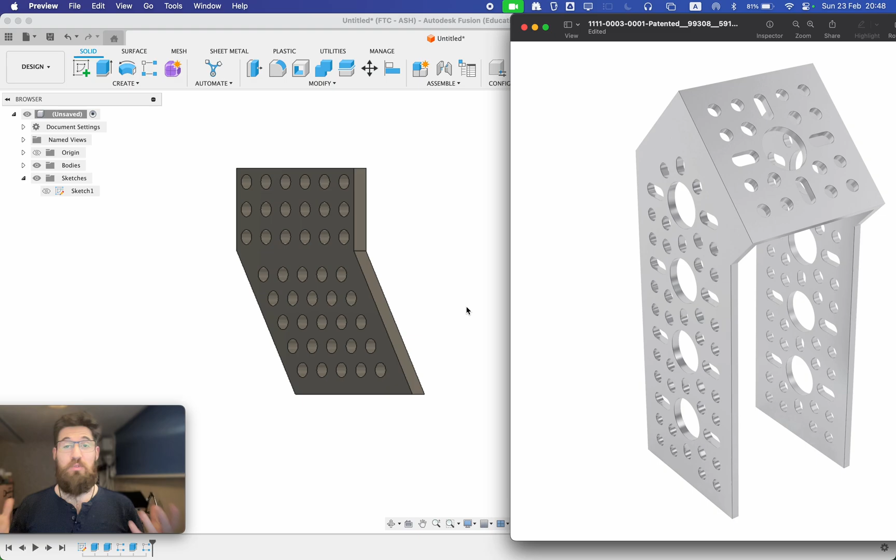On Fusion, everything starts, and the basic workflow is effectively taking a two-dimensional sketch and pulling it out into three-dimensional space. So for a quick example, let's just try something like that.

Up in the top in our toolbar, in the solid workspace, we're going to go ahead and click Create Sketch. And once you select Create Sketch, it's going to ask you to select a different plane.

If we look at our view cube here, we can see our top, our front, and our right. And we can select different planes that would be, say, the top of our cube, the front of our cube, or the right of our cube.

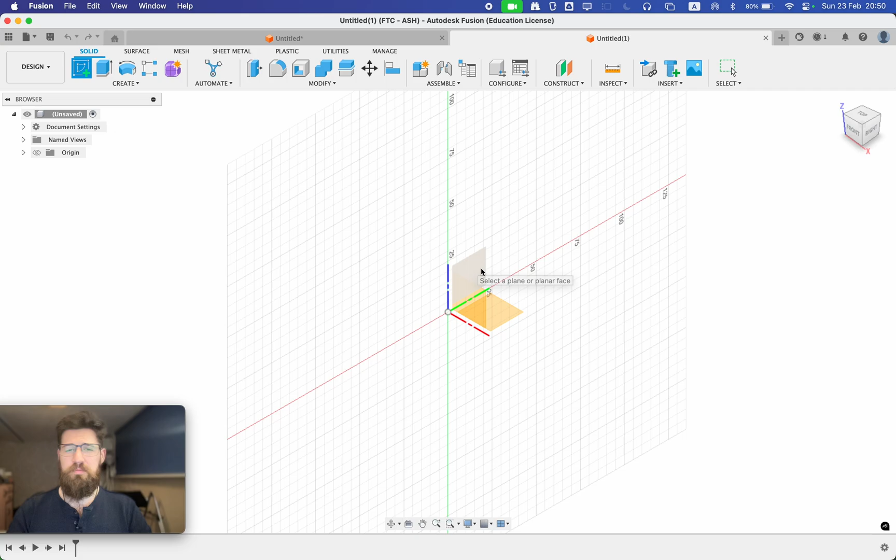For me, I'm going to choose the top of the cube, which is going to be on the XY plane - this red X, and then this green Y plane. So I'll go ahead and select that. You notice that it automatically tilts my screen to be able to see directly on top of the XY plane.

You'll also notice that my tools panel has changed. Instead of using the solid tools, we're now looking at the sketch tools. For the sketch tools, it's exactly the same as you would use in a lot of drawing programs, to be honest. It kind of feels a bit like Microsoft Paint.

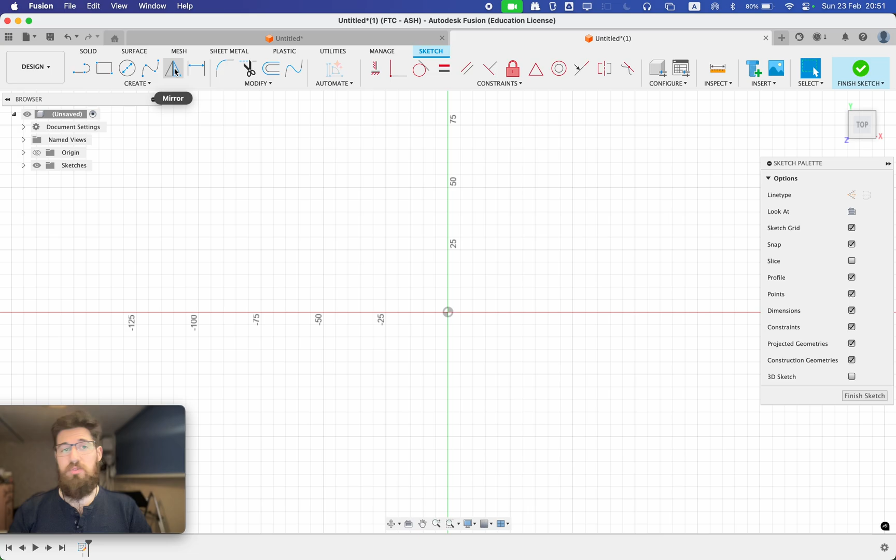So you can grab lines, two-point rectangles, circles, splines, mirrors. You can make ellipses, polygons. There's a lot of different things you can make.

So for example, let's just take a two-point rectangle. I'll click on this. And you always want to start your sketches from the origin point. This is this little circle with these dashed lines. This basically keeps your designs centered in place.

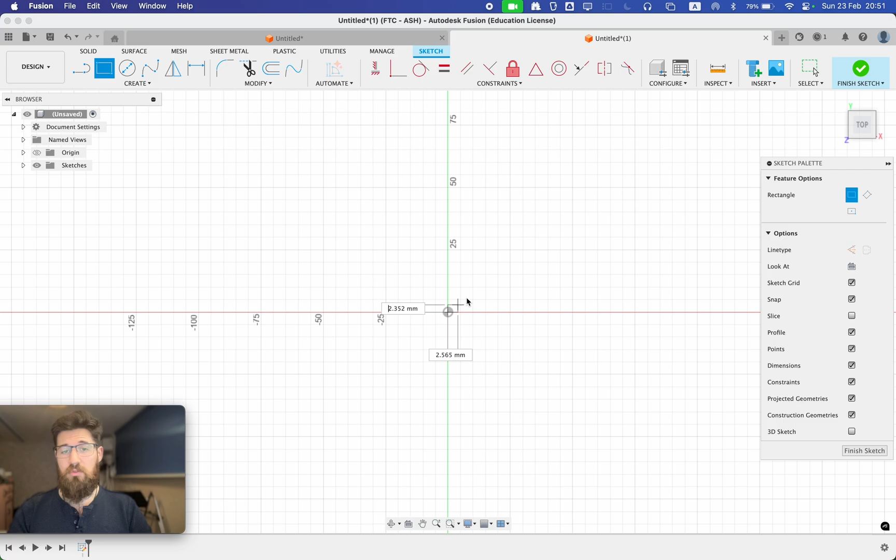So I'm going to go ahead and click to place my first corner. I can drag up, and it doesn't matter what dimensions you choose. I'll just click to finish off this.

Now in order to bring my square into 3D space, I'm going to go ahead and click on the solid workspace or the solid work toolbox, and then go ahead and select Extrude. It'll automatically select the face that we just drew, and now if I were to click and drag, you can see we're actually starting to drag this into 3D space.

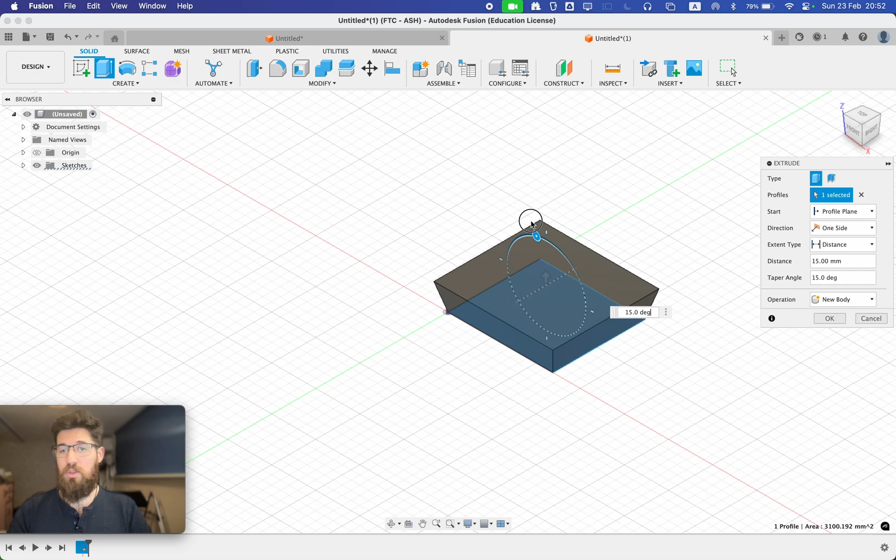You can also type in exact measurements if you want, or you can click and drag. You can even change the taper at which you are dragging things out. I'm going to choose 0 degrees for now because we're going to be making this as a 3D bracket.

So I'll choose OK. You'll notice that we now have two features down on the bottom of our parametric timeline. We have our sketch and we have our extrude.

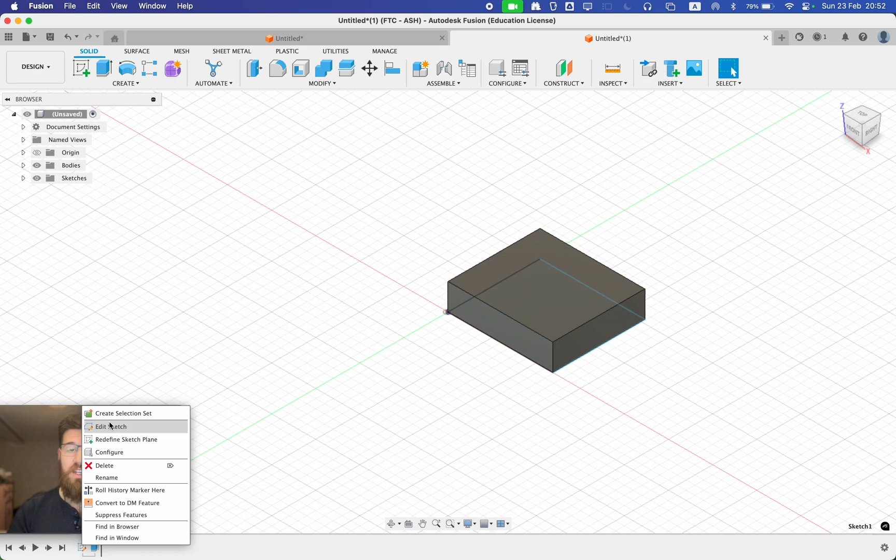Now this is the real magic of using Fusion as a CAD software. If I go ahead and right click, edit the sketch, or I double click on it, I can actually edit this sketch. Now on a sketch, anything that is black, you really can't change. It's a constrained or fully constrained section of that sketch. We'll talk more about that in the future, but effectively, you can't click and drag on black sections.

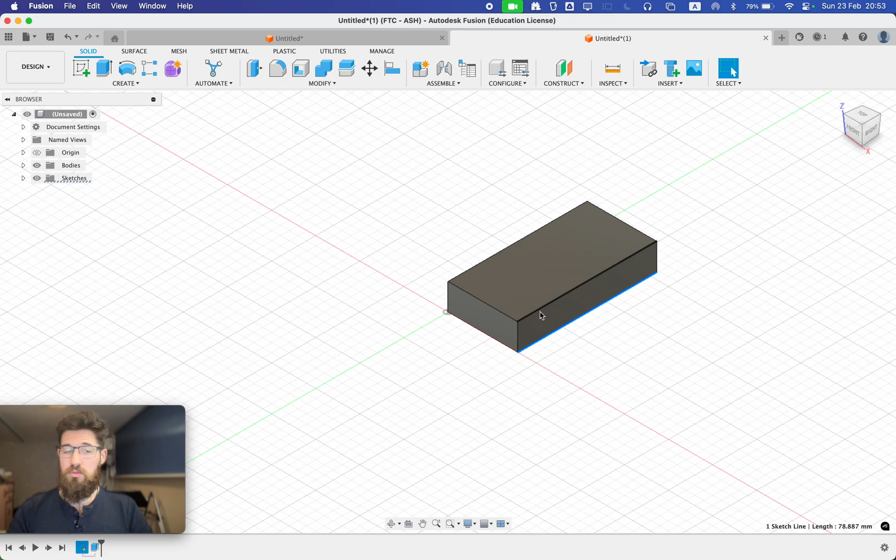Blue tools, you can. So if I click and drag on these blue sections, you'll notice that I can actually grab and move these to any size I want. So where we had a square before, let's try to make a rectangle. And if I click Finish Sketch, you'll notice that my extrude automatically adapted to the sketch.

And that's what a parametric modeling is all about. You can go back, make changes, and those changes will propagate across the rest of your sketch. Super, super handy. So let's get started actually drawing our component here.

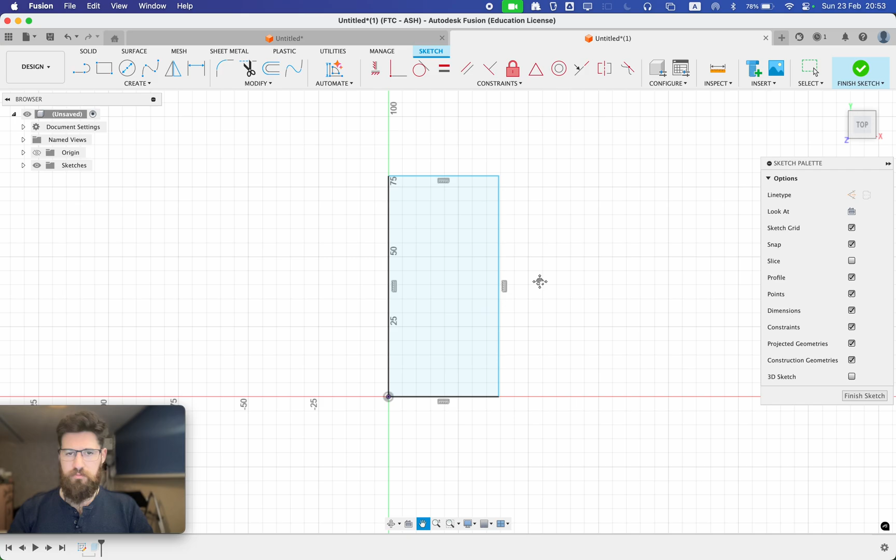So let's go back and we're going to edit our sketch. And we're going to add a few more constraints here. Instead of just randomly choosing a size, we're actually going to go ahead and put in some dimensions.

So up on the sketch tool here, I can go ahead and click on the sketch dimensions. I can select, oh, sorry, I already had the line selected. I'm going to press escape to deselect a line. Now I'll select the sketch dimensions again.

I'll select this far left-hand line and drag out. It doesn't matter how far out I drag here. This is effectively just going to show me the dimension of this blue line here. So if I click, it's going to show that dimension. It's going to give me some time to type it in. So for me, I'm going to select 24 millimeters as my initial height.

You'll now notice that I can no longer drag this top blue bar. It's now being black because it's being constrained since there's a dimension applied to it. I wouldn't be able to drag this, but I can still drag this side because I haven't defined the distance here.

Let's go ahead and grab one more sketch. I'll press escape, select this top line, grab my sketch dimension, and drag out. It doesn't matter where I put this, it's just whatever is easiest visually to see. I'm going to select 48 millimeters because I'm trying to create a part that fits well with a goBILDA piece, 24 by 48. The width of those structural bars are 48 mil, and that's going to make life really easy.

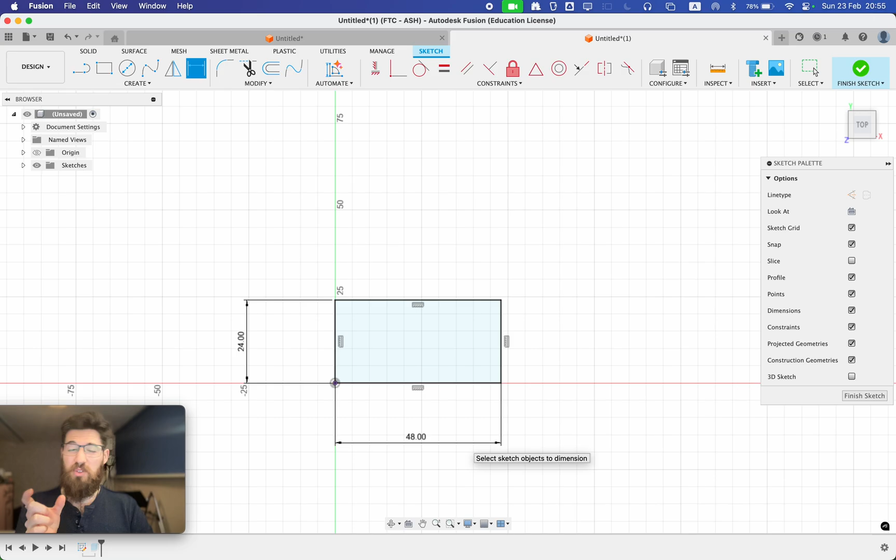If I press escape to get off my tool, you'll notice I can no longer click and drag any of these sections. If I go to the browser panel, you'll notice sketch one has this little lock icon on it. That means all the pieces inside the sketch are currently constrained, and that is good. We want fully constrained sketches because that allows our parametric models to adapt easier over time.

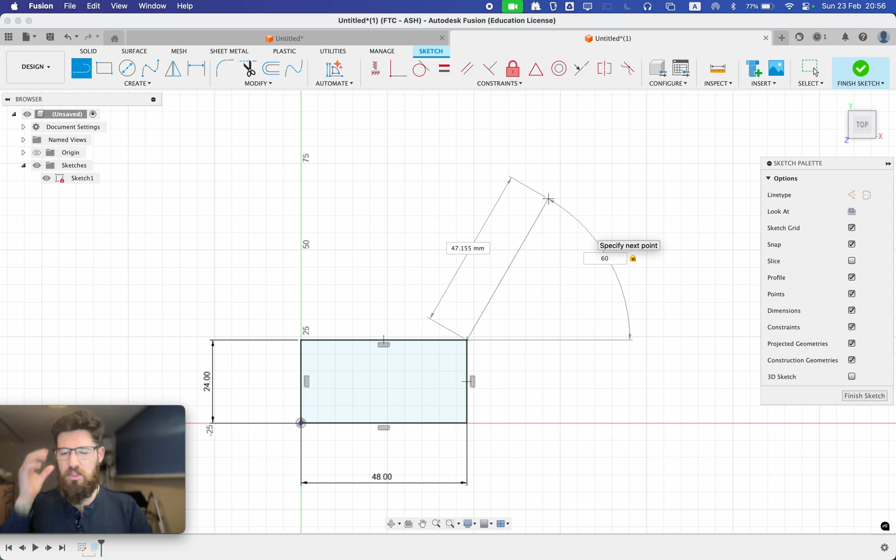Let's go ahead and add in this 30-degree angle bracket. I'm going to put in a line, grab from the corner here, and you can choose wherever you want. You could choose a specific length right now if you want, or press Tab to select the degrees at this point. Here you could select, say, 120, or select 30 degrees, or select a 90-degree angle or a 60-degree angle, which is going to give us that 30 we want. You notice that the line gets constrained.

It also draws out this imaginary line here, called the construction line. It's not a real piece of geometry, and we can't actually edit with it. We'll delete that line, and we'll delete this one as well. I can just drag a line out, put it wherever I want, and press this little checkbox to finish off my line.

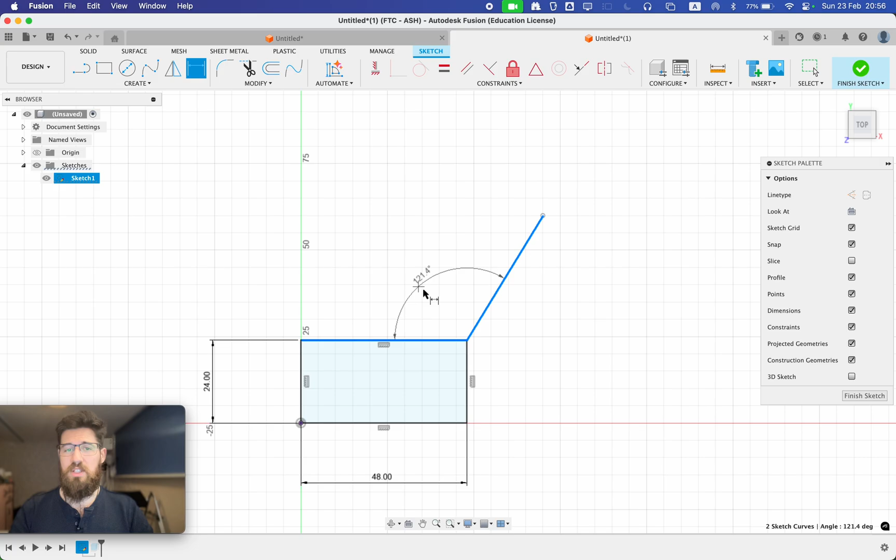Then I can grab this sketch dimension, click on my object, click on the second one, and you notice that an angle automatically comes up. Ooh, that was pretty good, I almost hit 120 right away, and we're going to put in 120 degrees. So when I select that, my line is automatically constrained at 120. You'll notice I can grab this blue dot at the end and select the length I want, because we haven't put a length on this yet.

So let's go ahead and do that now. We'll put in sketch dimension, and we'll call this one 48 millimeters. You could make this longer if you wanted to, but for now I'm just going to select 48. And I'm going to grab another line, we'll go ahead and just drag this out. You can put this wherever you want, I'm just going to put it over here for example.

Now we would want this obviously to be parallel with this other piece. If I were to hover up over here, you can drag off, and you'll notice Fusion's going to try to create some lines for me to keep that symmetry. But just to show you an example, I'm going to go ahead and click over here and finish off that.

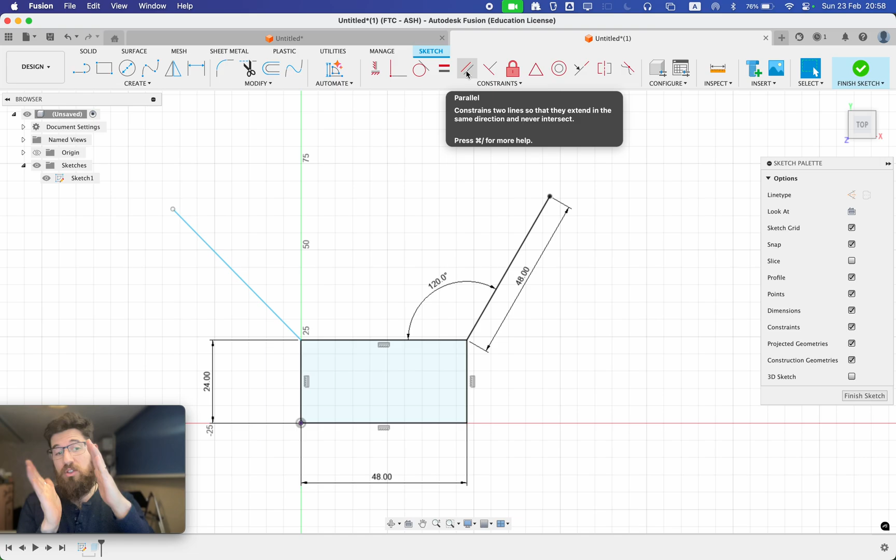Now let's make this line up with this part here. Up at the top here are these things called constraints, which we've been talking about a little bit. What I can do is grab this parallel constraint, and it's going to constrain two lines so they always stay parallel to one another. If I click on this, I can grab my first line, grab my second line, and you notice that it automatically snaps them to be parallel. You can also notice I have this constraint applied that says these two lines are parallel with one another. So if I click and drag this, no matter where I move it with my mouse, these two lines are going to stay parallel now.

Now you'll notice that these are no longer the same height. I want them to be the same. There are two ways to do that. I could grab my sketch dimension out and make this 48.

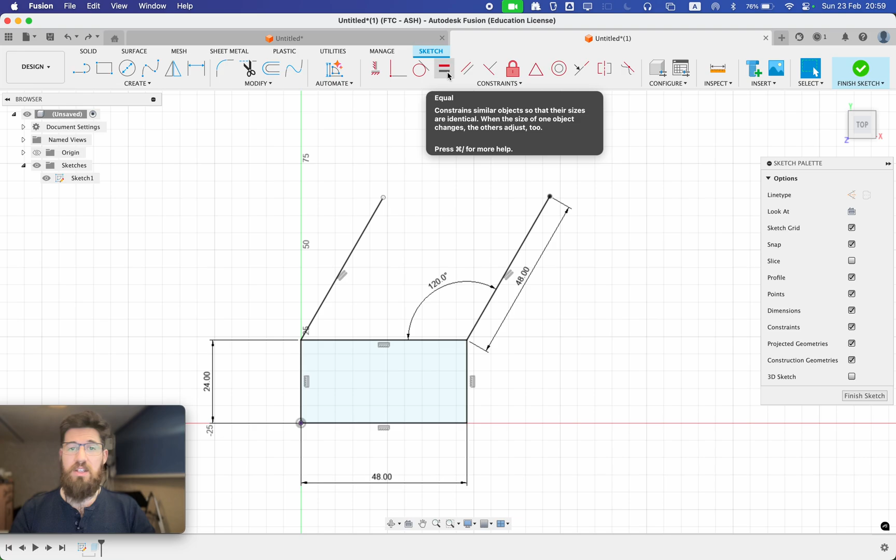The problem with doing that is I'm starting to add a few too many dimensions. What would be better is if I constrain these to be equal. So if I grab this red and gray charcoal line underneath, it's going to make two lines or two objects the same size. It's going to make them equal.

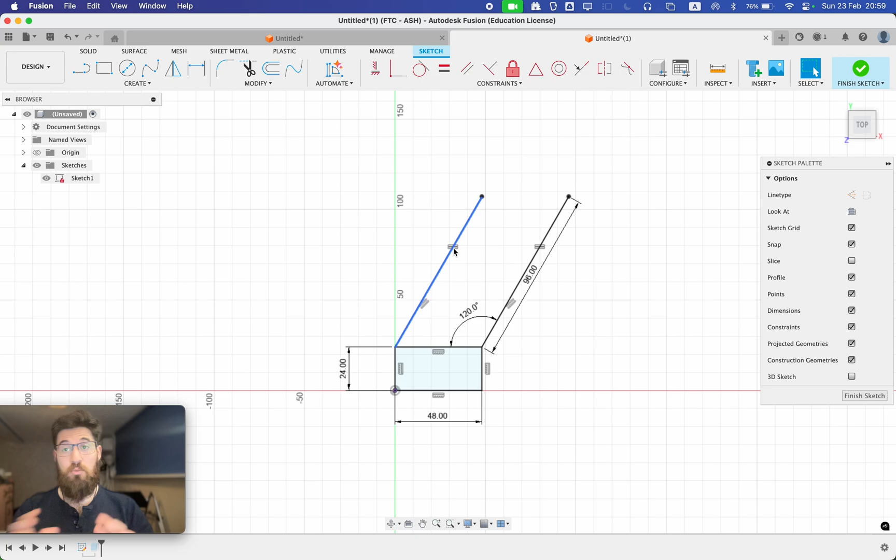If I click on this and come from my this to my that, you'll notice these two are equal. So if I change this 48, let's say we make it 96, my second line automatically updated. If I had put a dimension on this left hand side, I wouldn't be able to automatically update that. We'll undo that and keep it at 48 for now.

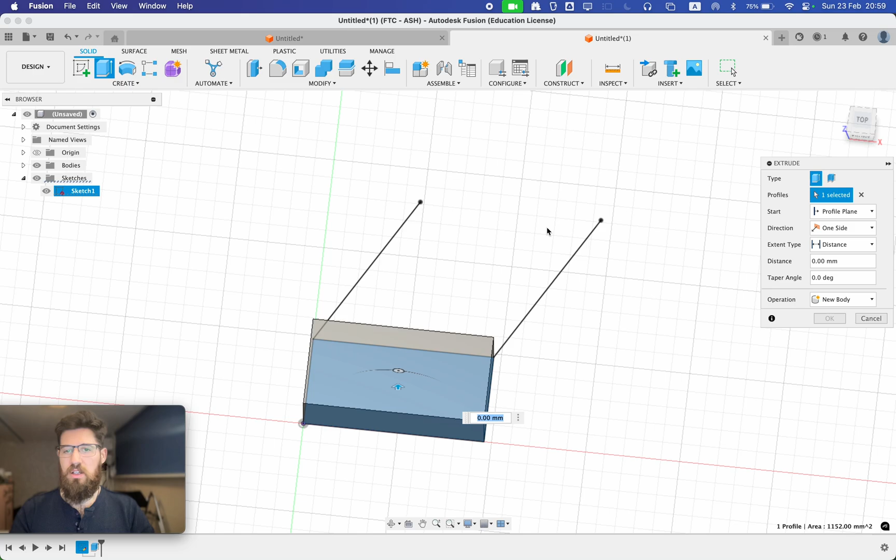Now I want to show you something different about Fusion as well. If I click Finish Sketch, and show this sketch, if I try to extrude, you'll notice that the only face I can select is this bottom face here. I cannot select this top face. That's because in Fusion, you can only extrude complete and closed faces.

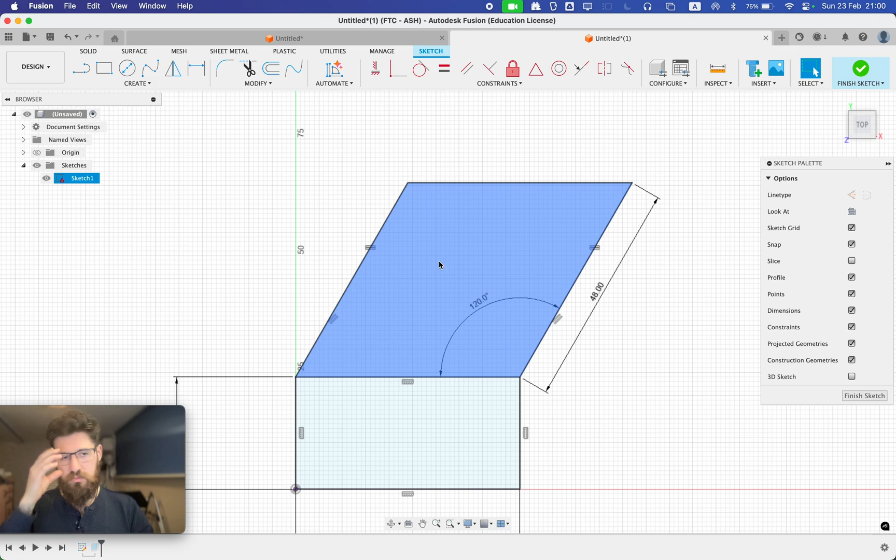So let's go back and edit that sketch. Let's grab a line and close off our sketch here. You'll notice that when I closed off that face, it automatically highlighted blue. That means I can now extrude this face. So let's go ahead and finish our sketch, and you'll notice that now we've got our point.

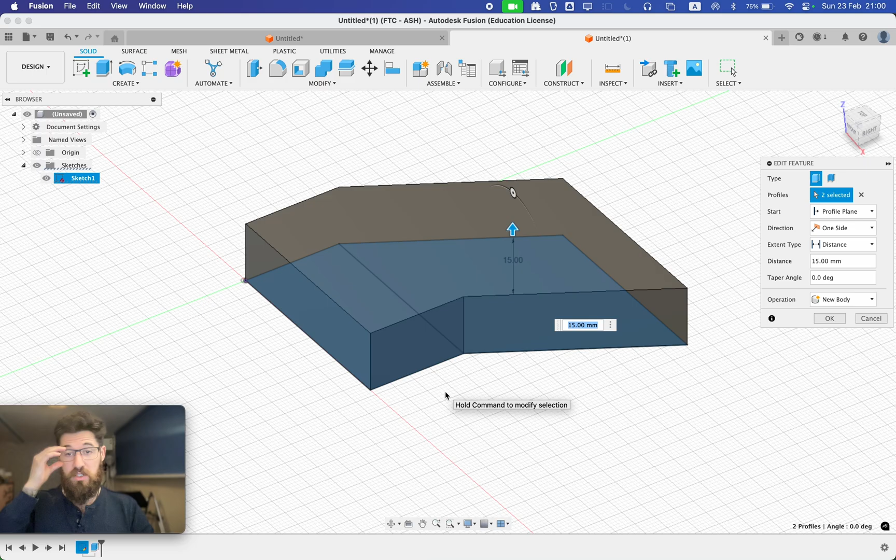I'm going to hide this sketch again because we're going to edit our extrude rather than adding a new one, going back to edit this one. As I change this extrude, I'm actually going to select both faces this time, so it pulls out both faces all at once. And I'm going to make this a width of 5 mil.

If you're going to use plywood, 4 mil is generally pretty good for a bracket, then you can do them layered together. If you're going to 3D print this bracket, you might make it 5 millimeters. That tends to be a pretty good width for a little extra structural stability. Now on this extrude tool, we'll talk more about this in the future, but effectively we want to have a distance of 5, and we'll have an operation of a new body.

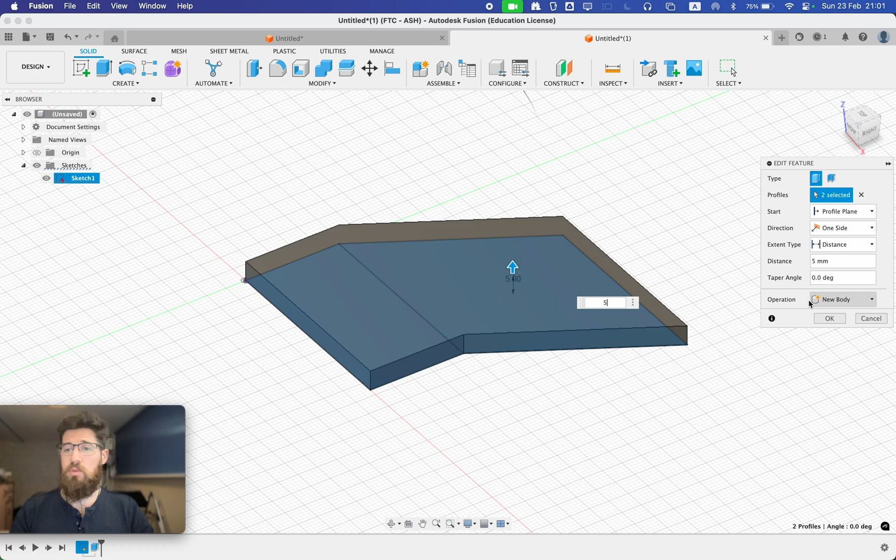When I click OK, you'll notice up at the top I now have a new folder that shows up in my browsers. I have my sketches folder, and if I open up this bodies, I now have a body folder. So I've got one solid body actually created on my piece.

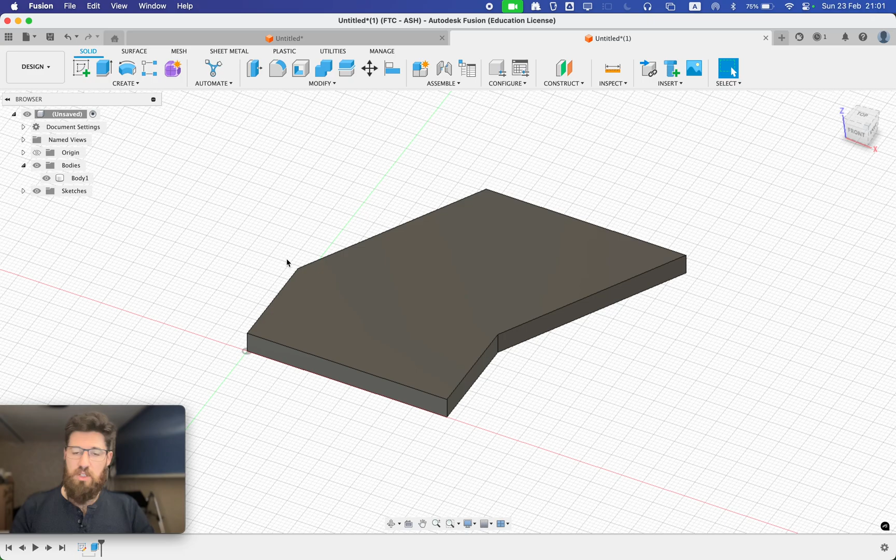So in order to make this something we can actually use as a bracket, we're going to have some holes in it so we can mount it to something. Let's go ahead and add in some holes. I'm going to create a new sketch. For sketches, you can set them on planes, but you can also create a sketch on faces themselves. In this case, I'm going to create a sketch on this face.

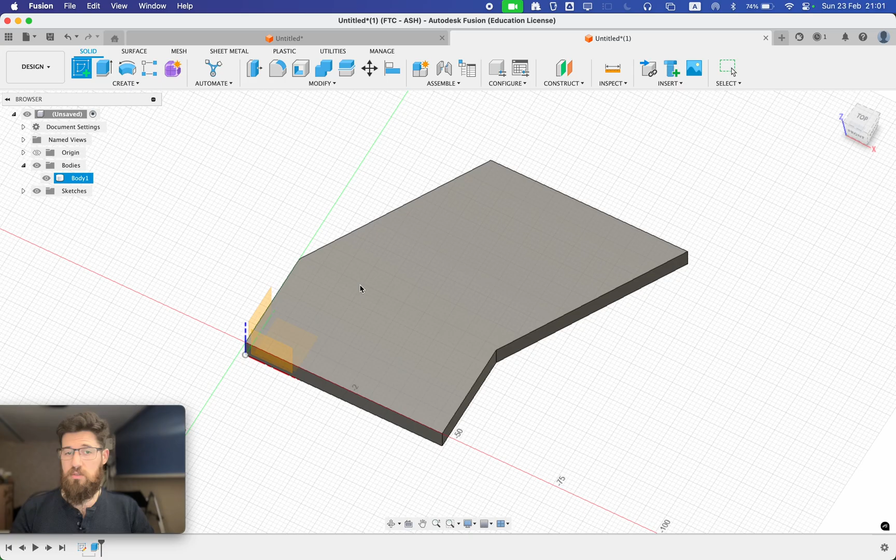I want to have a nice rectangle hole pattern all the way showing up here. So what I'm going to do, at least with goBILDA parts, they work on an 8 millimeter grid with 4 millimeter holes. So I'm going to grab a rectangle, and grab in the bottom corner here.

But before I place this, I don't want this to have real geometry because we want to put a circle in. So I'm going to grab my rectangle tool, and over on the right hand side, my options panel, I'm going to click on this line type where it says construction. If I click on this construction line and put my rectangle in, you'll notice that now I have these dashed lines. These dashed lines you cannot extrude, you cannot change, but they're going to help us with lining up our circle with where we want a circle to be.

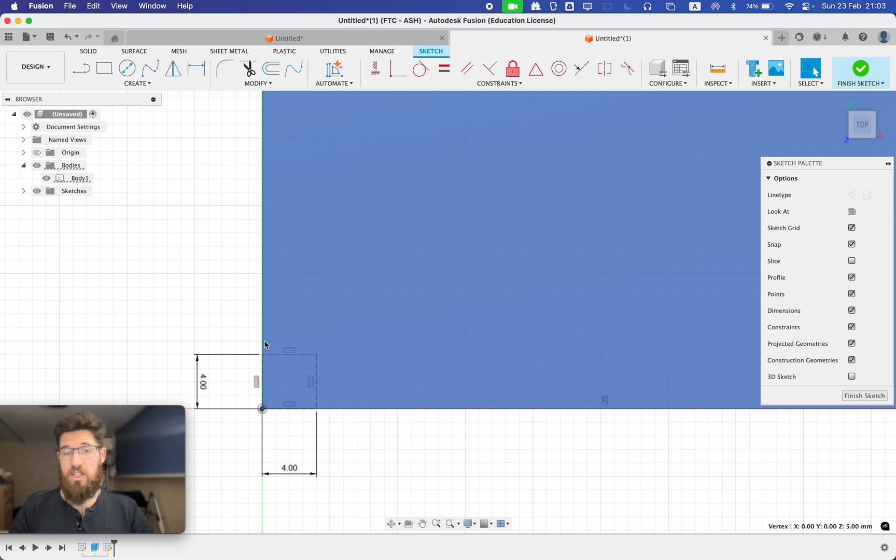So I'm going to type in the number 4. You'll notice I have a little lock symbol there because now I put a constraint in. I'm going to press tab, press 4 again, and now I've got a 4x4 rectangle that I can work with. I also could just choose the size rectangle I want and put in my sketch dimensions, but for now I'm just going to put in 4x4.

Then we're going to go up and grab our circle tool. We're going to line ourselves up right on this corner. You'll notice that we automatically snap in Fusion. And I'm going to deselect my construction line.

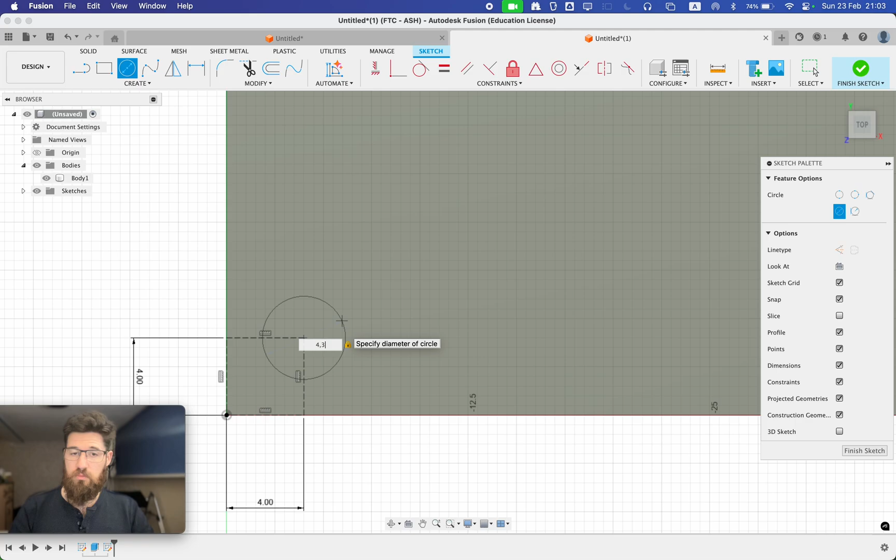goBILDA works with a 4 millimeter pattern, so if you're going to laser cut this out, 4 millimeters is probably good. I'm going to choose 4.3 because I find that a 4.3 hole, at least on the 3D printers that we use, is a pretty good size.

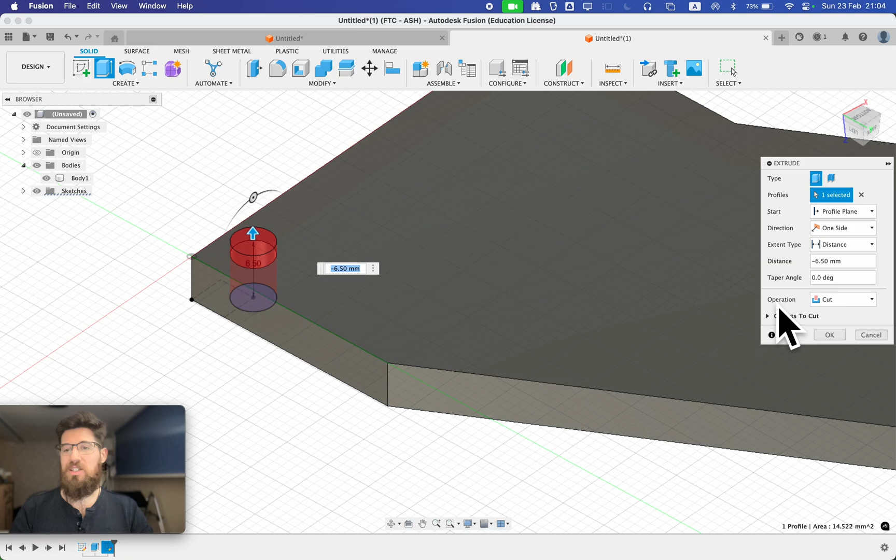I'm going to go back to my solid tool, grab my extrude, or you can press E on your keyboard, select the face that I want, and drag this up or down. You'll notice the extrude tool can also be used to cut pieces through. Last time we created a new body; this time we're actually going to cut through our piece. Fusion's smart enough to select the correct operation for us.

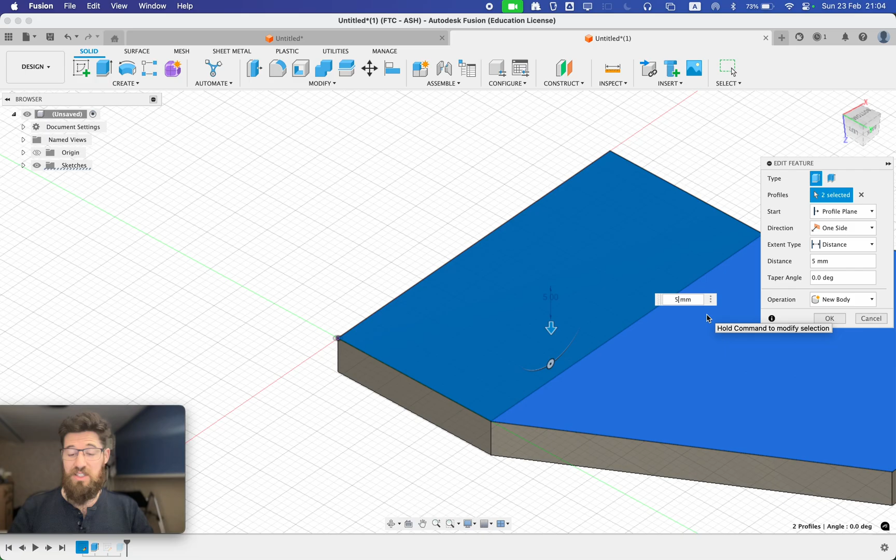I'm going to select my exact 5 millimeters and select OK. Now I just made a bit of a faux pas in parametric modeling, and I'll show you why. Let's go back to extrude number 1, and say we find 5 millimeters is not thick enough - we want to make it thicker. Let's make it 10 millimeters. Where'd our hole go? If I come back up, the hole is still there, but it only has a depth of 6.5 millimeters because we only made that cut 6.5 millimeters.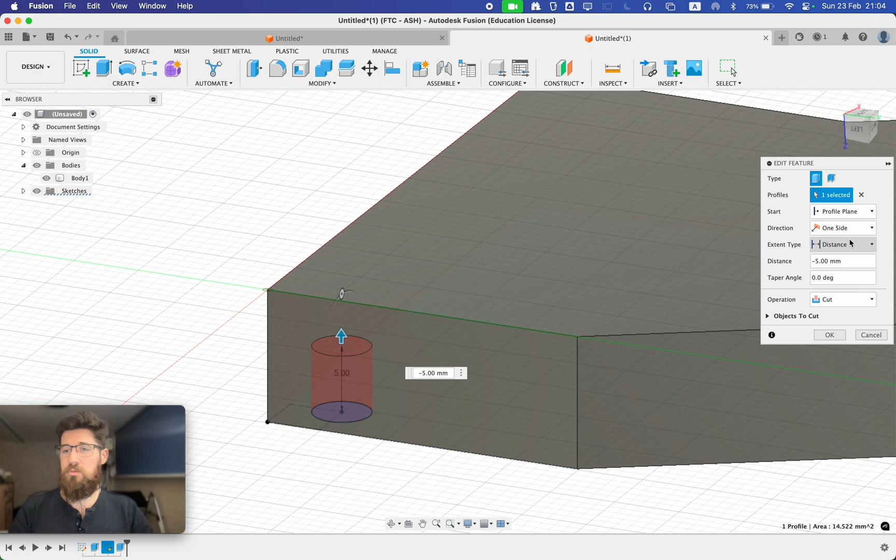So rather than choosing an exact depth, over here for extent type, rather than distance, I'm going to say 'to object.' What 'to object' lets us do is select the face at the end, and it's automatically going to cut through that hole to the whole length of the object.

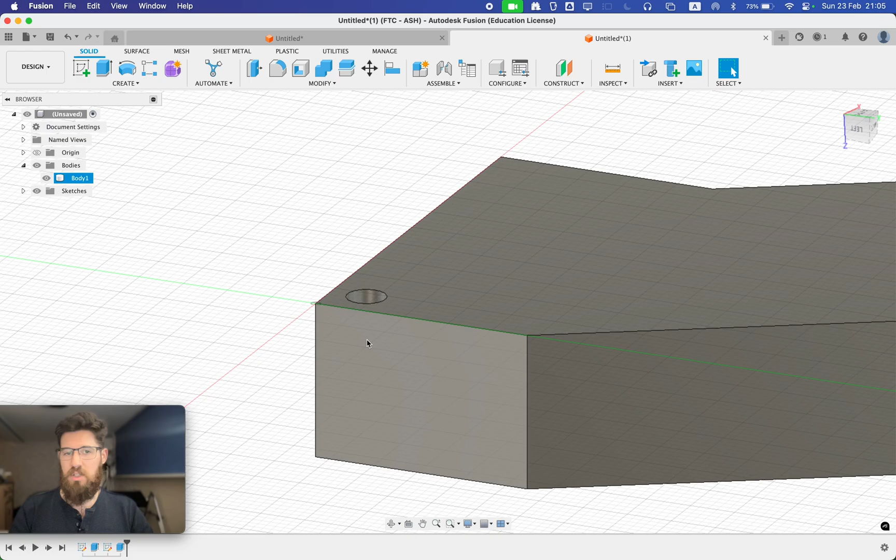So if I select OK, now I can go back and edit this first sketch. I can make it even deeper - let's make it something stupid like 17 millimeters. You notice that hole cuts clean through every time. So having that 'to object' option when extruding through holes can really help. Let's change that back to something more appropriate, like 5 millimeters, because that's getting a little crazy.

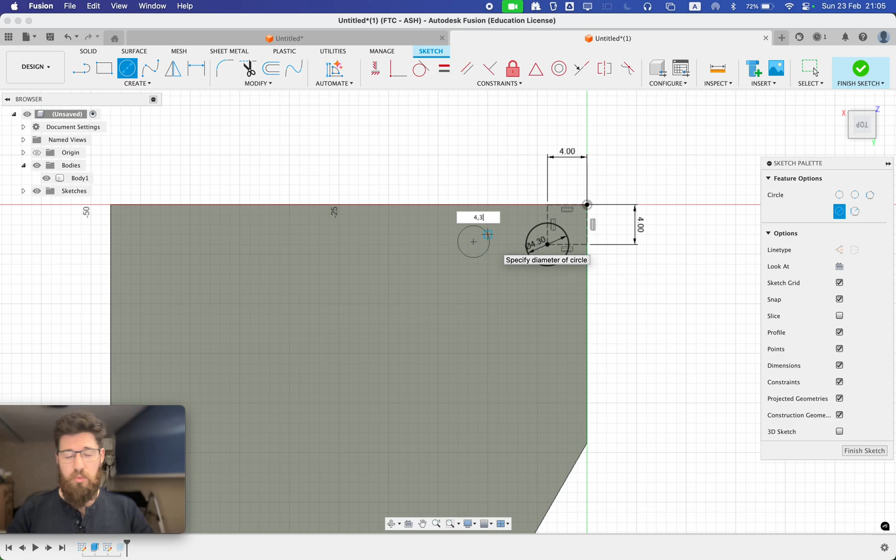Now what we could do is go back to our sketch, put in another circle, make it 4.3, and line it up so our pieces are 8 millimeters centered across from each other. We could line these up so that dot lines up in center, but that's going to take forever to line up all of these holes.

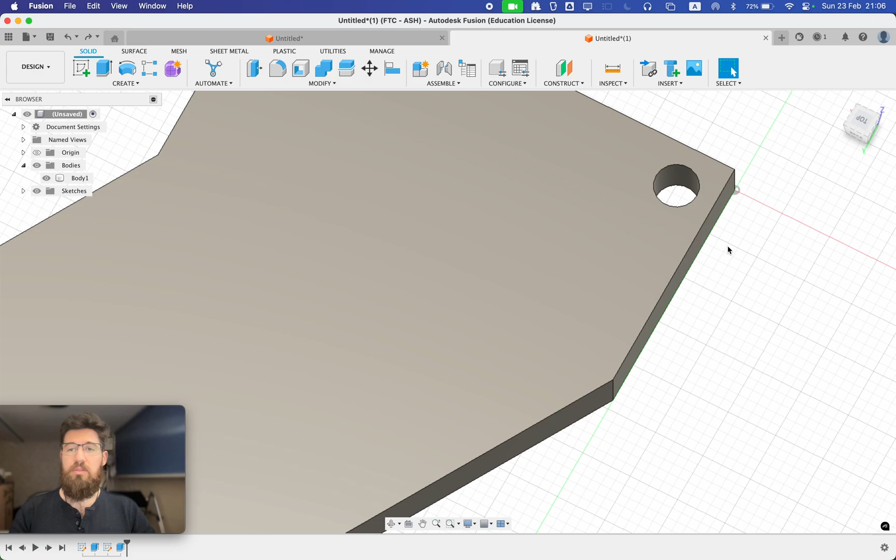Rather than doing that, we're going to use the rectangular pattern feature in Fusion. Rectangular pattern lets us take a feature and copy it across. I'm going to come up to my solid workspace and select rectangular pattern. Underneath rectangular pattern, you can pattern bodies, faces, features, and components. We'll talk more about these later, but we already know what a body is.

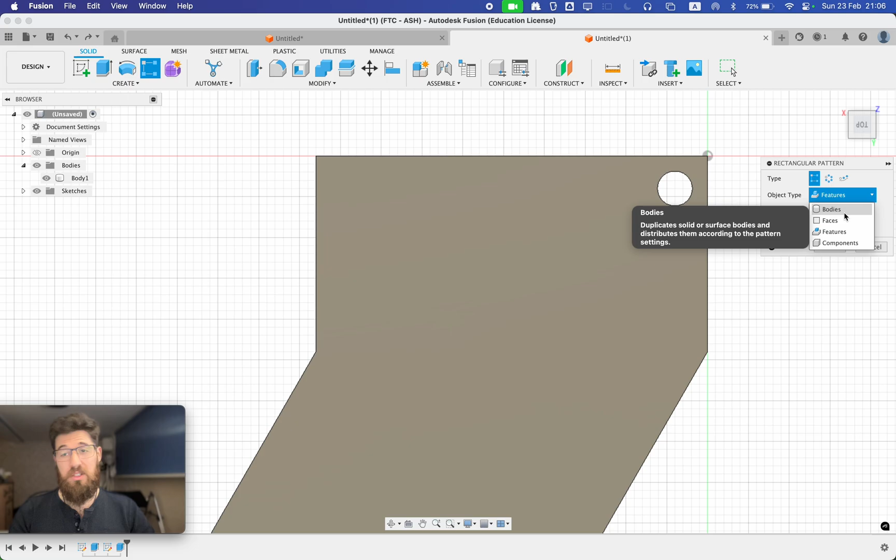So if I were to select body and select this body here, and for axes select this top axis, you notice I can drag out and create multiple copies of this one body, which is pretty cool. But what we want to do is create multiple copies of our hole.

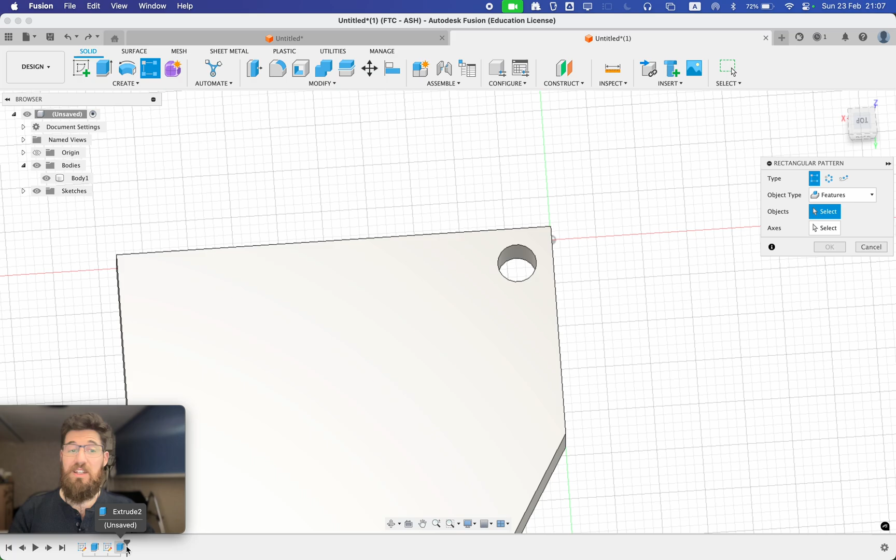So I'm going to click rectangular pattern again. Rather than selecting bodies, we're going to select features, and now I can select a feature in the timeline - in my case this extrude number 2. Then for the axes, we're going to select this top face edge and this face edge. If I click and drag out, you'll notice our hole is actually starting to drag out into our shape.

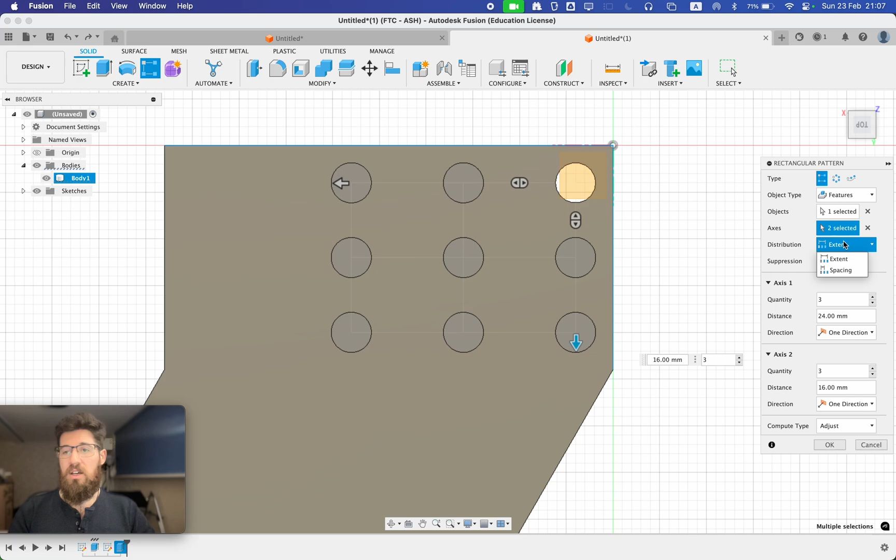Now I'm going to click on the top for this view cube so we can get something a little better. Underneath the axes, there's distribution - you can distribute it by spacing or by extent for how long our piece is. For goBILDA pieces, we're going to select spacing, and the spacing is 8 millimeters by 8 millimeters. I can select more quantity on my axis 1, and I think 6 looks about right. So I'm pretty happy with that.

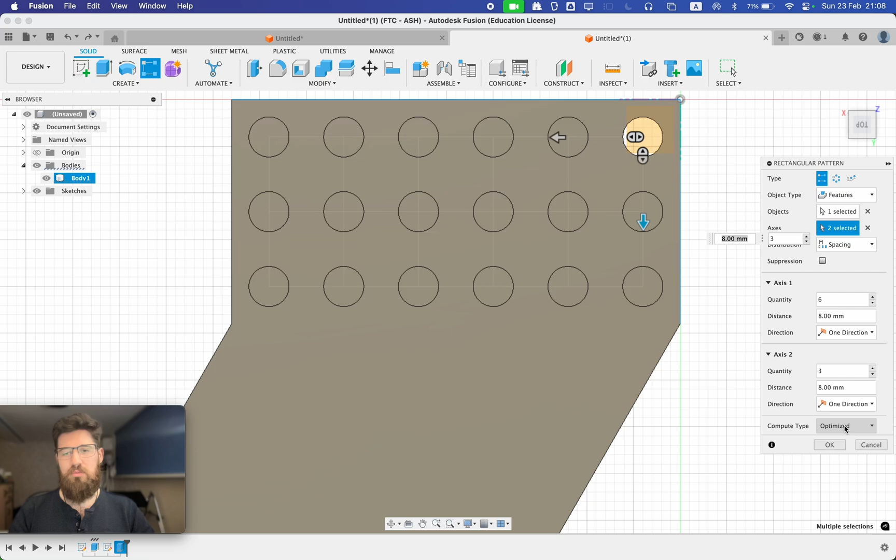If I select OK, or right before that, underneath here is this compute type - there's optimize, identical, and adjust. I'm going to select optimized. Depending how fast your computer is, optimized is going to be a little easier on your resources. Select OK, and now you can see I've actually cut through a whole bunch of these rectangular pieces.

Last thing we're going to do for this corner bracket before we finish this off is the same thing again for a rectangular pattern. But you can probably see we're going to run into a bit of a problem right now in the future.

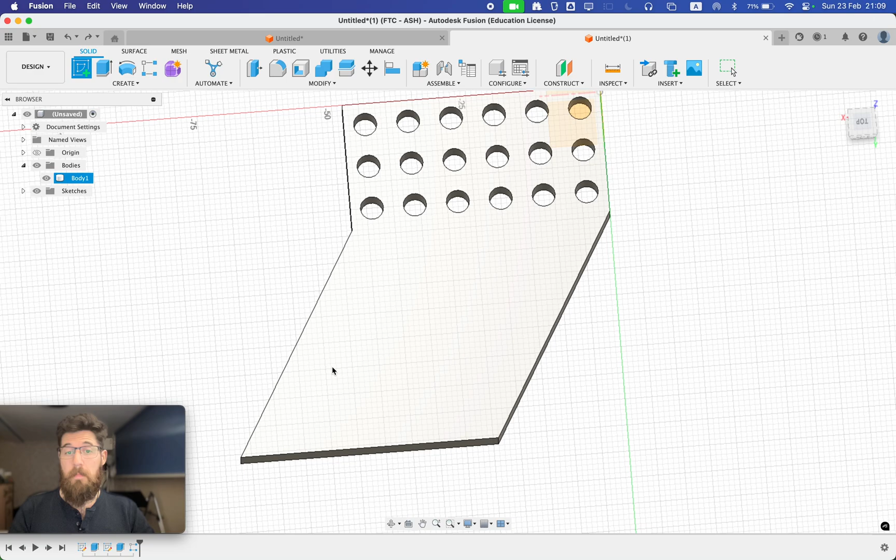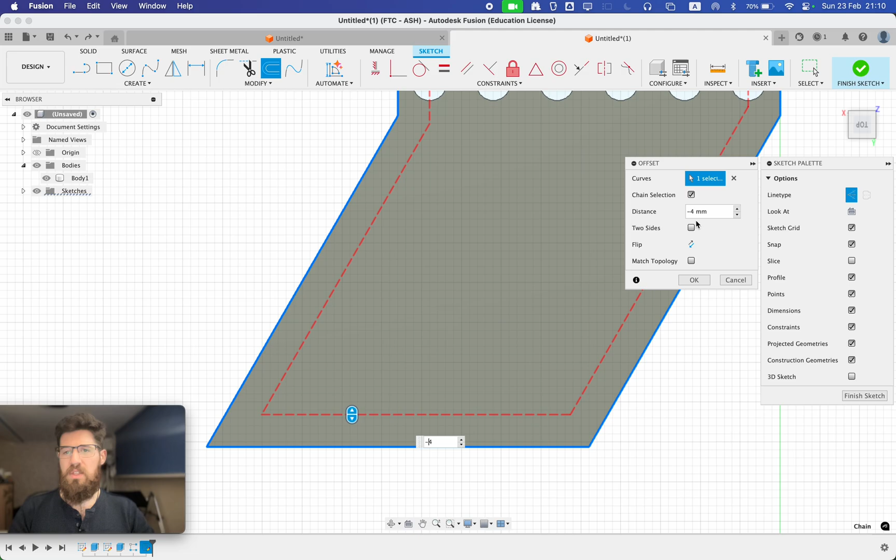So let's go ahead and create one last sketch on this top face again, and I'm going to select this offset tool. An offset tool lets me grab a path and drag in to choose a specific offset of all those lines. So it's going to offset this line by 4. But if you find it's on the wrong side, you can put in -4, and it'll put it on the other side. I'll select OK, and now we've got a 4 millimeter piece in here that we can work with on the corner.

Let's grab another circle, turn off our construction line, and make this 4.3 again. Now I'm going to finish my sketch.

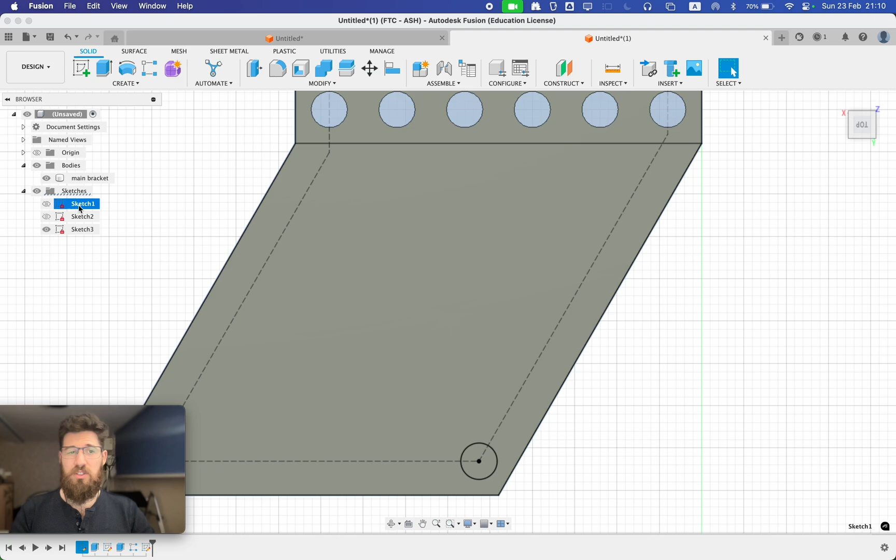Before I go ahead and rectangular pattern this out, the next thing I'm going to do is rename my bodies here. I'm going to rename this main bracket. I'm also going to rename my sketches: Sketch 1 we can call the bracket body, Sketch 2 the top hole, and Sketch 3 the angled hole. It's good practice to rename your sketches so you know what it is you're working and editing through.

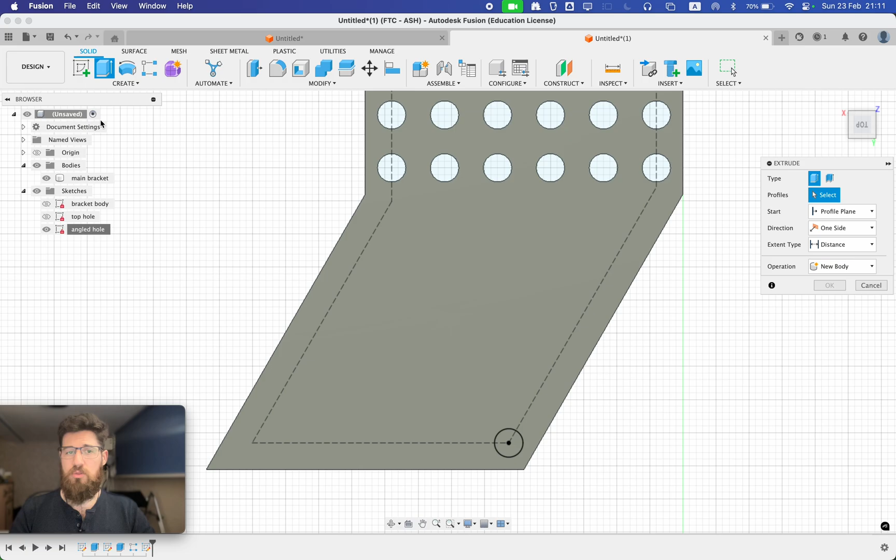I'm going to select my Extrude tool again, grab this, look on the other side, pull it in, and rather than selecting distance, I'm going to say 'to object' and select that top face. Now it's going to always cut through no matter what we do.

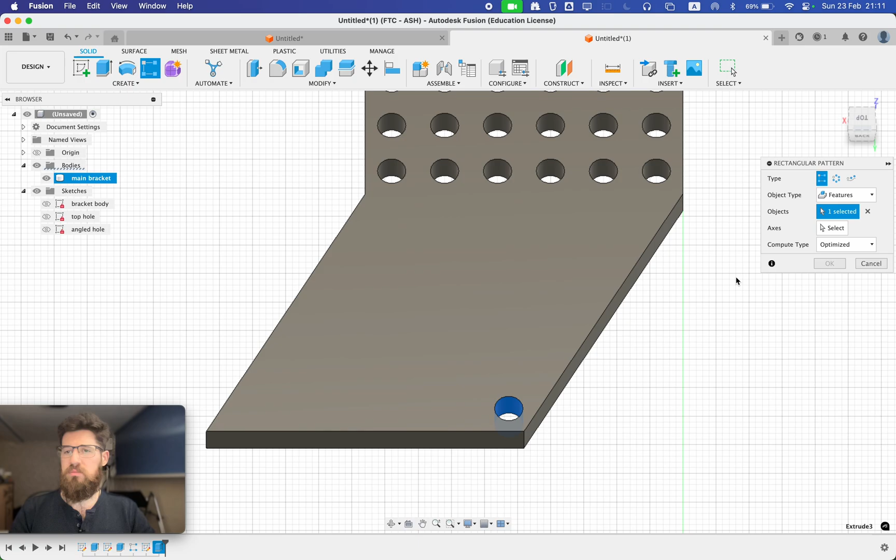Last thing to finish off this tool, we're going to rectangular pattern. Make sure we have features selected, and we'll select the feature in our timeline. Then for our axes, I'm going to select this top axis and this side axis, and you'll notice it automatically matches our angle for that as well, which is pretty cool.

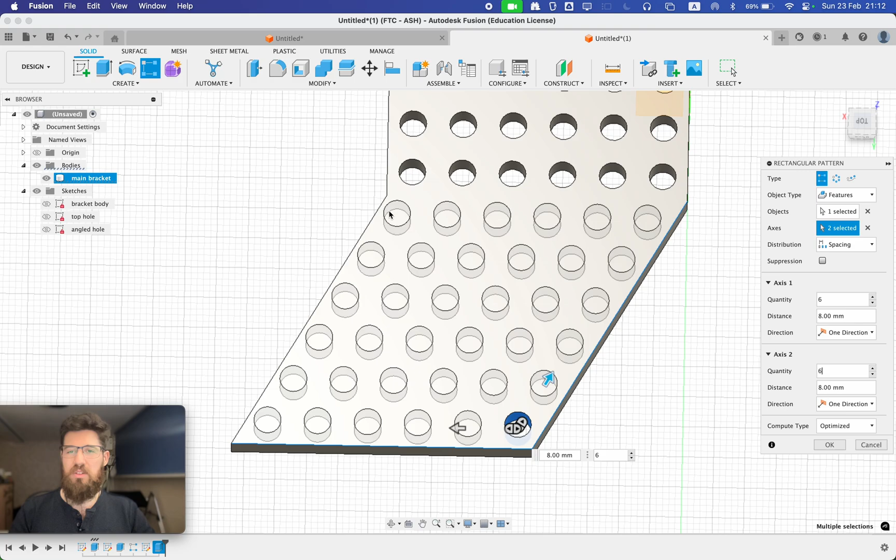So let's go ahead and change the spacing. Our spacing is 8 millimeters by 8 millimeters, and let's add in a few more copies here. It looks like 6 is about right on the side, and 6 is about right on that side. But for a 3D printed part, that's going to be pretty narrow, so I think I might only make it 5.

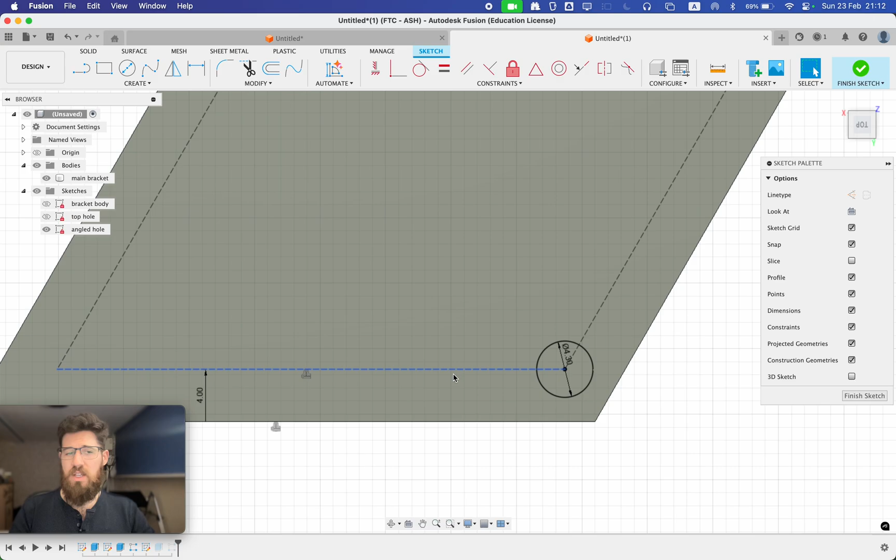Choose OK, and then I'm actually going to move this whole pattern this way—on the camera, sorry, that way a little bit. So let's go back and edit our sketch. I don't like how close this is to the wall. I like that it's about 4 millimeters up off the bottom, but it's not very useful for us.

So what I'm going to do is delete this offset, so now we can move this circle freely. I'm going to grab a dimension line out from this center dot to the bottom line. I want that to be 4 millimeters. Now you'll notice if I drag this circle around, it's stuck at 4 millimeters exactly.

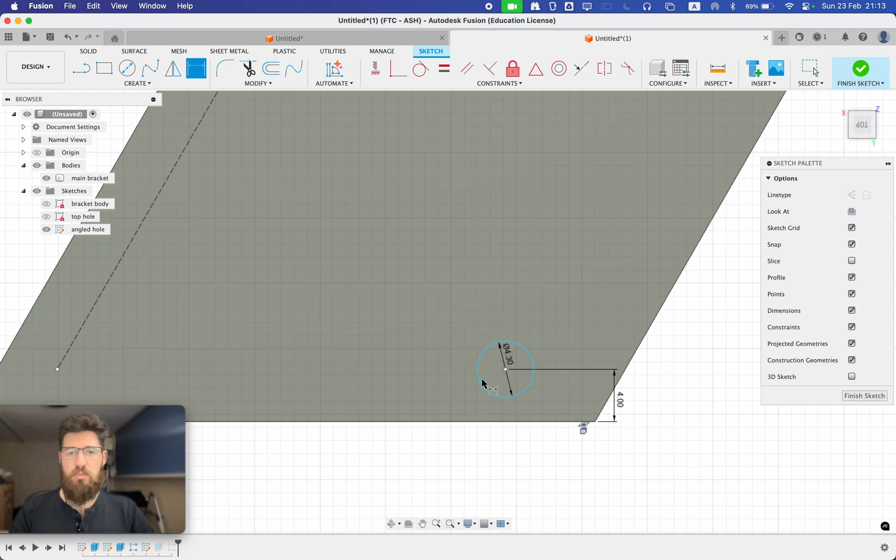So I want it to be 4 mil here, but I'm not sure how far I want it from this distance, so I'm going to grab another sketch dimension from my dot and this line here—oh sorry, I didn't grab that. I'm going to grab another sketch dimension from the center point on the circle to this point, and let's say something like 5 millimeters.

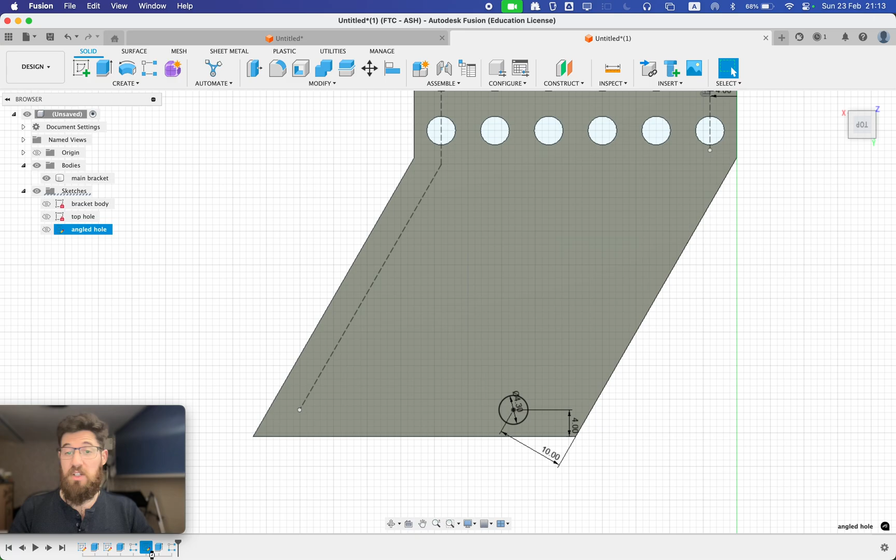Let's finish the sketch and see what that looks like. I want that to be a little bit more centered, so let's go back and edit that sketch a little more. Let's expand this to maybe 10—10 is probably a little too far, so maybe let's do 7.5. That looks about right for what I want on my pattern here.

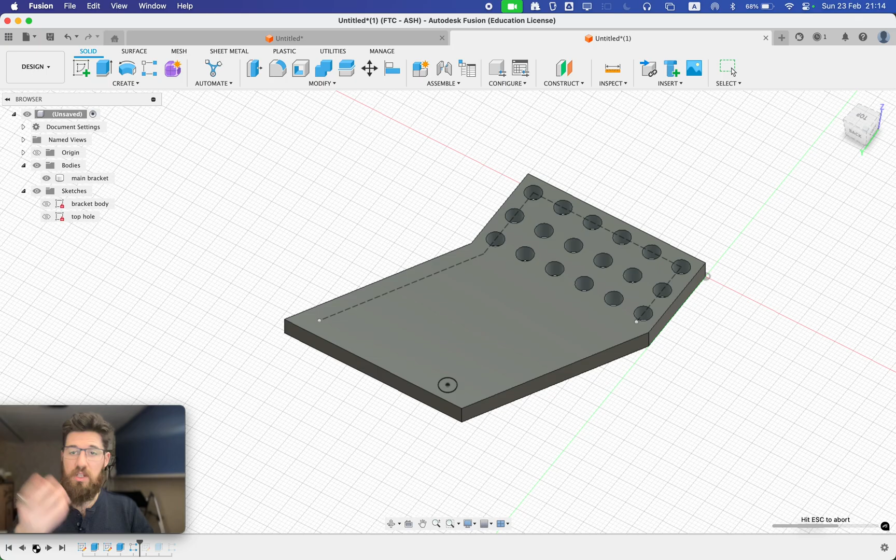That is making a simple corner bracket. I could really easily take one piece, mount it up top, take a second piece, and have a nice 30-degree mounted bracket. So the basic workflow in Fusion: make a two-dimensional sketch, pull it up in 3D, make another sketch, cut through those pieces, and then repeat on a bunch of different axes. That's kind of the main basic workflow.

So I hope you found that useful, and I'll see you in the next one. We're going to talk more about different sketching tools you can use and the large variety of shapes that you can make in Fusion 360.